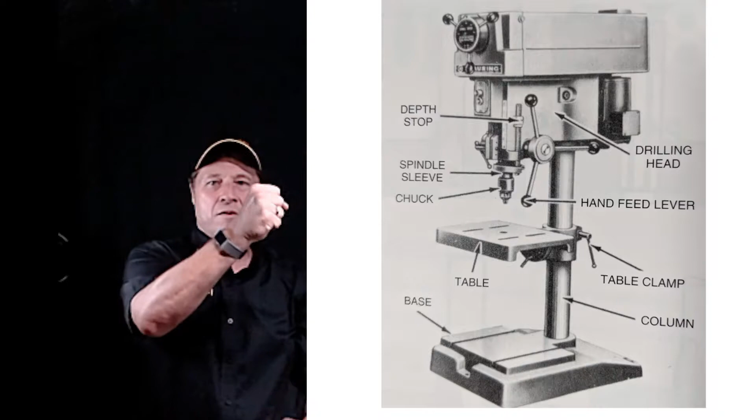Now, imagine if the table was slid down that column a bit more, and you're pulling that handle and not yet at the bottom of the hole. How do you keep pulling the handle? If it only had one handle, you'd have to hold it, get your hand up top, push it, stand on the side, turn your hand over, lift it, grab it again, and pull it. That's why you've got the 3 handles there. You pull, the next one comes around, you pull, and then you go to your final depth, and then you back it off. That's why you see those 3 handles on the hand feed lever.

The table, you'll see on the back of the table, is a table clamp. That clamp does exactly what it says. You lock it, and that table will not go down or up the column.

A lot of these drill presses have a toothed track - I don't want to call it a gear, but there is a gear in the table. As you crank that handle, that rolling gear will pull the table up or roll it down. Not all drill presses have it; a lot of them you just have to unlock it and shimmy it up the column and back down. It's not designed to be precise, it's just designed to get your work closer to or further away. That handle and the depth stop are what's going to help you get your precision.

A lot of times on these drill presses, the table can tilt to the left or to the right, and some of the tables even swivel, which is really helpful when you're trying to do 3 or 4 holes and you've clamped a vise to the table, and you don't want to unclamp the vise every time you've got to drill another hole. So some of these tables have some maneuverability so you can rotate into the next position. On some drill presses, you can also rotate the head around to bring it into another position.

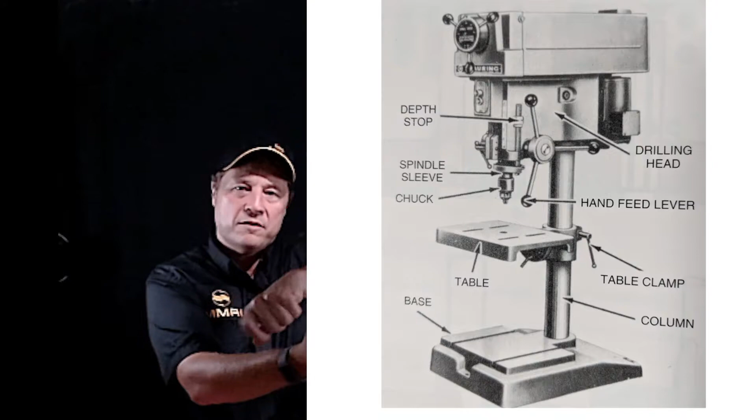You can take that table and swivel it right around 360 degrees, so you can get it right out of your way, and you can put a large piece of material on the floor and drill down into that.

So pretty universal, very useful. But the drill press, guys, is not the go-to choice for precision hole manufacturing. Now, can you accomplish some precision holes with it? For sure you can, and there's different ways of doing that. But if you want repeatability, speed, accuracy, working from a datum or starting position, you're going to do all your drilling on a mill. The drill press is for less precise hole creation or feature creation on holes.

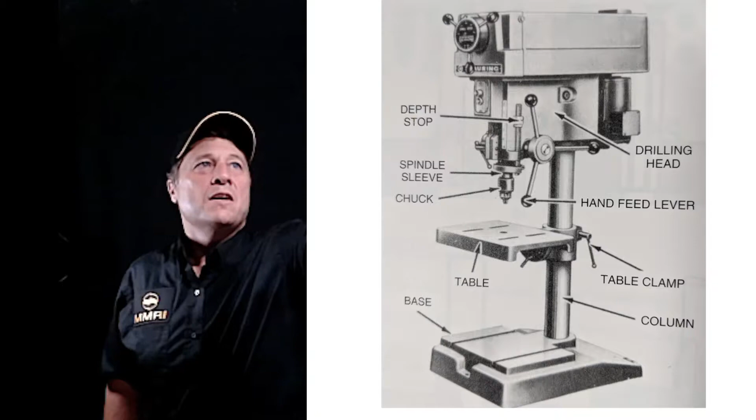What functions can a drill press perform? What features can it create? So here's the main features, guys. One, we all know drilling, right? That's its primary ability, is to drill holes, to create holes.

Two, countersinking. We'll talk about each of these in a minute. Three, tapping. Four, spot facing.

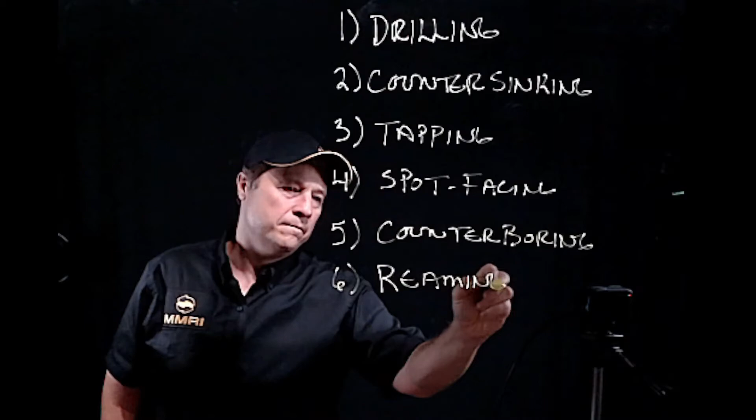Five, counter boring. Six, reaming. And seven is boring. So here's your seven main functions: drilling, countersinking, tapping, spot facing, counter boring, reaming, and boring.

Okay, so let me tell you what each of these features looks like. First of all, drilling. Let's say these are kind of the description of each of these features. Drilling is the operation of producing a hole by removing metal from a solid piece of material. If you're not able to take notes, come back to this section in the video when it's posted to get these descriptions.

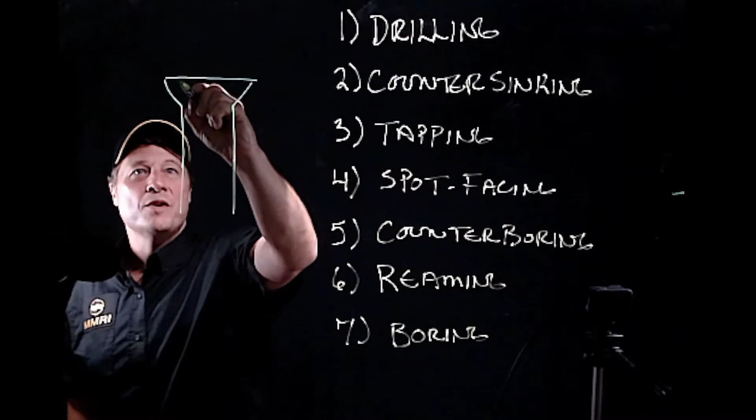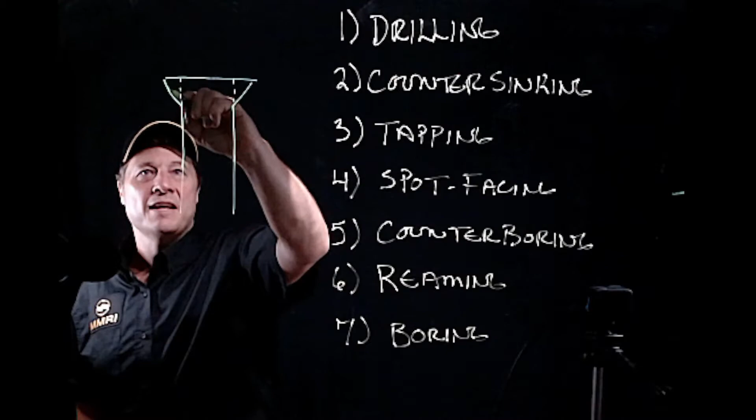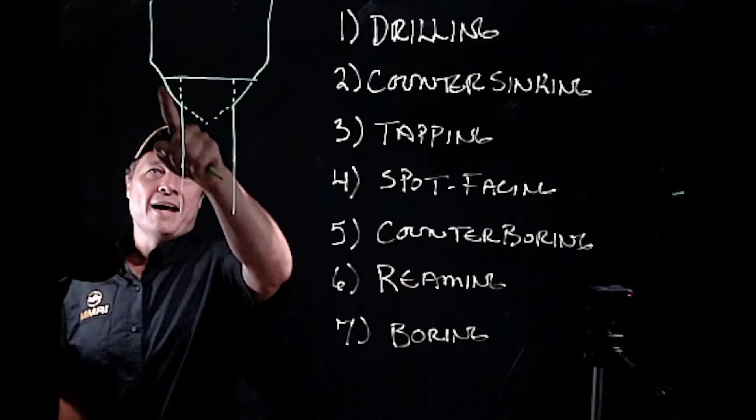Countersinking is the operation of producing a tapered enlargement on the end of a hole. So once I've produced a hole here, I can produce a conical or tapered feature on top of an existing hole. Originally the hole was just drilled straight like this, and then I put a countersink tool in, and that tool would continue in here, then come up like this if this were the countersink tool, and it would look like that. It looks like a drill, but it has a form that just cuts a conical shape on the top of a hole. That's a countersink.

Why would we put a countersink on the top of a hole? Well, a couple of reasons. One is a lot of guys just do it for aesthetics, to remove sharp burrs from the top of a hole. Other times we put it on to allow for a flat head bolt, since flat head bolts are tapered. So you create a countersink around the top of the hole to a depth allowing the bolt to sit just shallow of the top of the workpiece.

What about reaming? What is reaming? Well, reaming is the operation of sizing and producing a smooth round hole from a previously drilled hole. So this is interesting. If I want to drill a hole according to a print, the print says this hole needs to be...

0.500 inches in diameter. One of the things we're going to learn in this course, guys, is that precision matters. If you said to me, 'Adam, I need a half inch hole,' I'd ask, what's the precision? 'Oh no, I just need a half inch hole.' Okay, so I'll center drill and then drill a half inch hole, take a half inch drill and just bang it through. Is it going to measure a half inch? No, right? It'll be a couple thou, big or small. A drill is not super precise. It's approximate, very, very close.

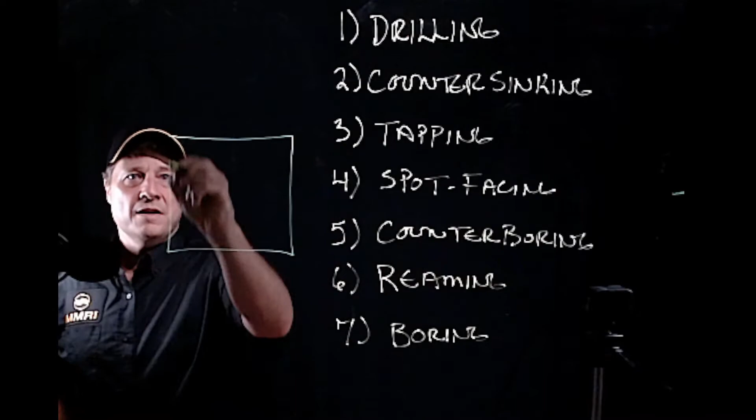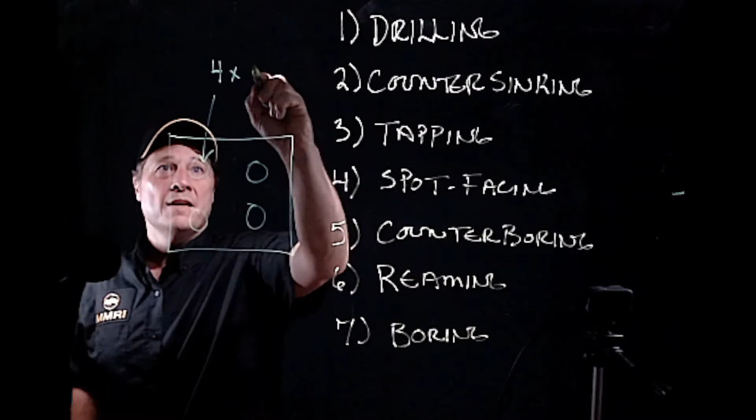You want a 0.500 hole, right? What the hole is used for matters. That's explained to us on the engineered drawing. If your drawing just says 4 holes and points to the hole saying 4 times 1/2 inch, that's what your print says.

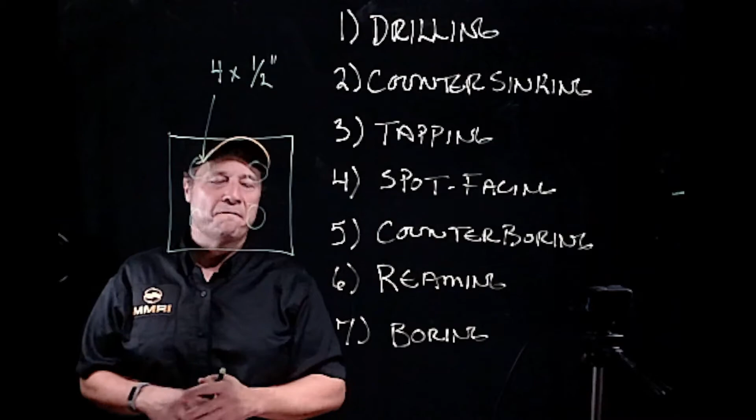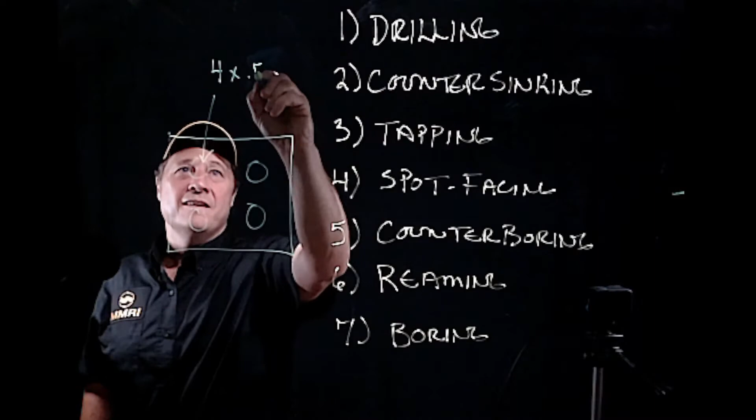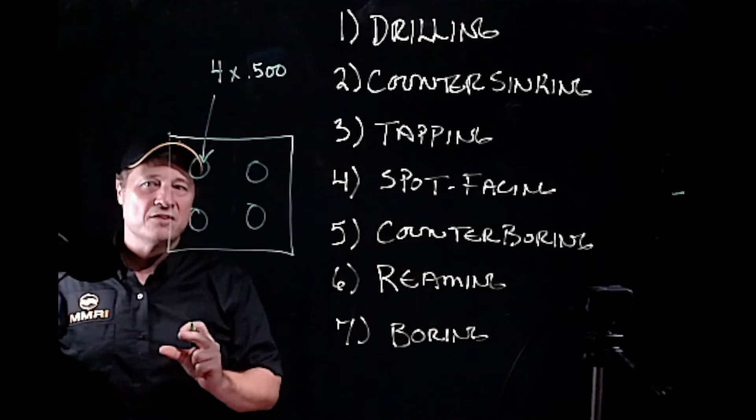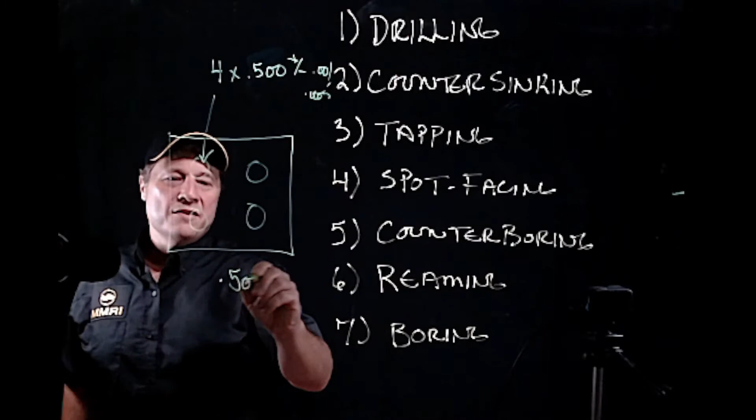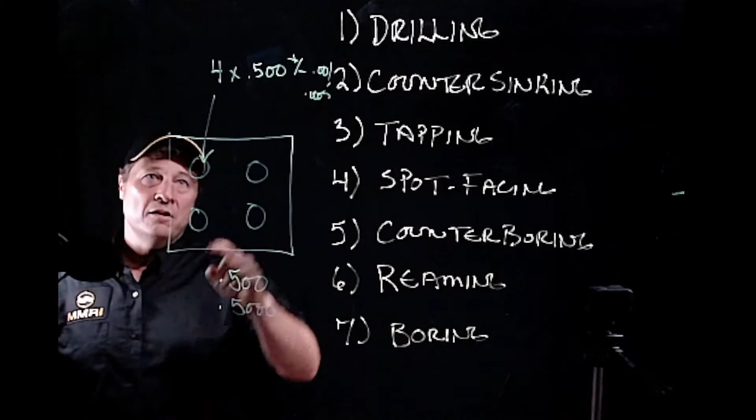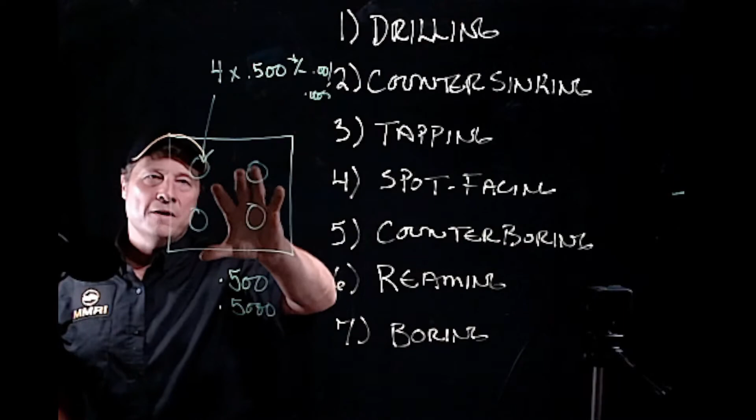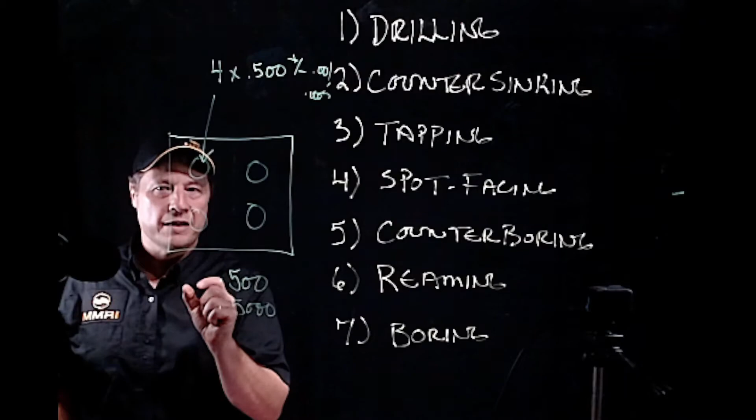But anytime I see a 3 decimal place, and especially a 4 decimal place, I'm going to ream that hole. So I would go get a drill that's 1 nominal size smaller than 1/2 inch. There's a rule to follow, we'll get to that later, but I want a drill that's approximately 11 to 15 thou smaller than 1/2 inch. I want to intentionally drill that hole a certain percentage smaller.

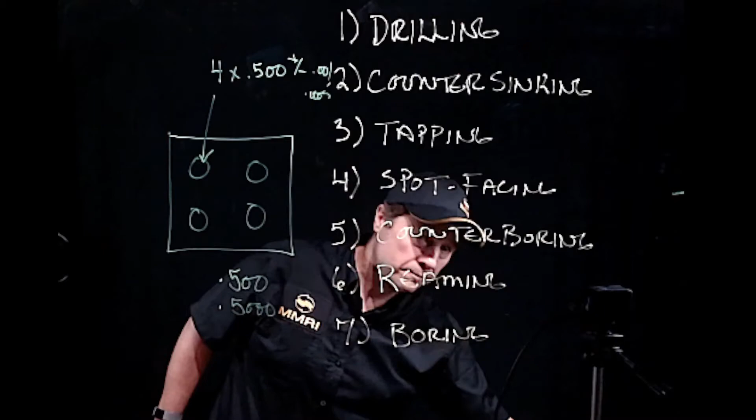Once I've drilled that hole, I will get a reamer and ream it to the exact size. A reamer is a precision cutting tool designed to enlarge an existing hole. You cannot put a reamer in a drill press on solid material and drill a precision hole. It does not have a cutting point, only cutting edges along the length of the tool. If you try to press that down into a part, you might as well take this marker and try to press it through steel, because there's no cutting edge at all.

It just crushes the reamer. So you need an existing hole, then you put the reamer in at the size you want, and you trace or follow that hole, and it will remove the excess material, create a good finish, and create an exact size.

Next, boring. Boring is the operation of truing or enlarging a hole with a single point cutting tool. Again, I'll create a hole to start with, and anytime you have to bore a hole to size, cut it as close to size as you can first. If you've got to cut a 1 inch 100 thou hole and you have a 1 inch drill, take the 1 inch drill.

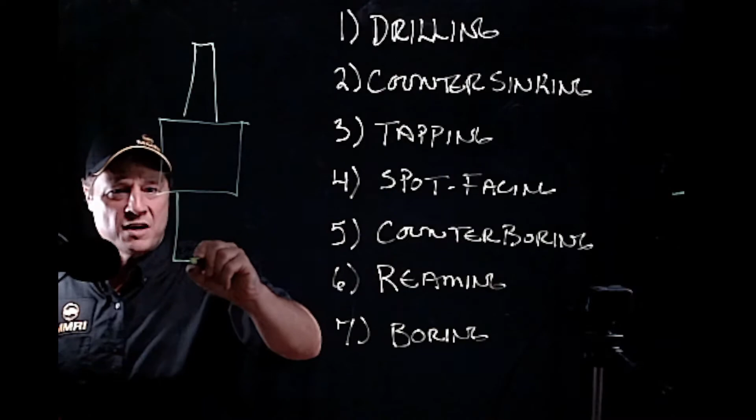Take the bigger drill and get rid of all the material you can, then put in your boring bar. You'll see in your Technology of Machine Tools book, it's just a head that fits into your drill press. A boring bar comes out of it, and then your cutting tool will be there.

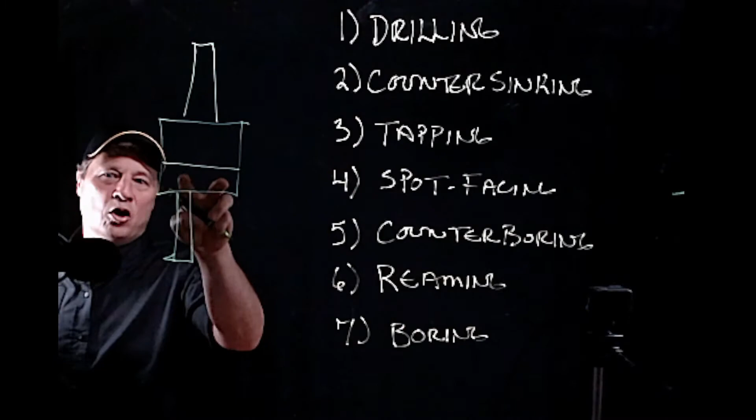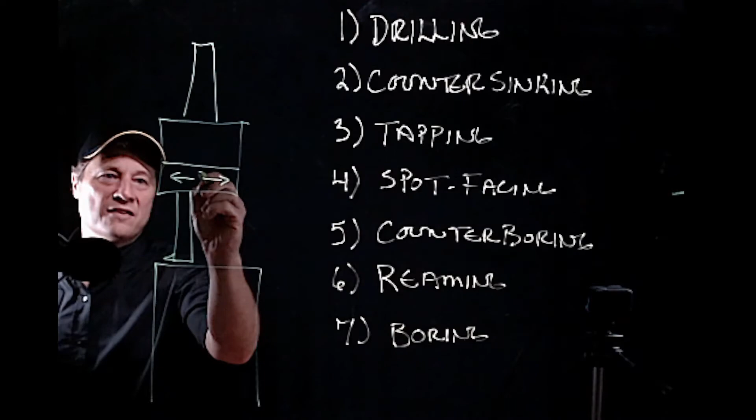This is dovetailed here, so I can take the lower half of this boring head and move it that way, or move it that way. You'll see my boring bar is off center. I would have an existing hole here, and I could bring the boring head down and dial this out this direction until the cutting tool is just touching this wall.

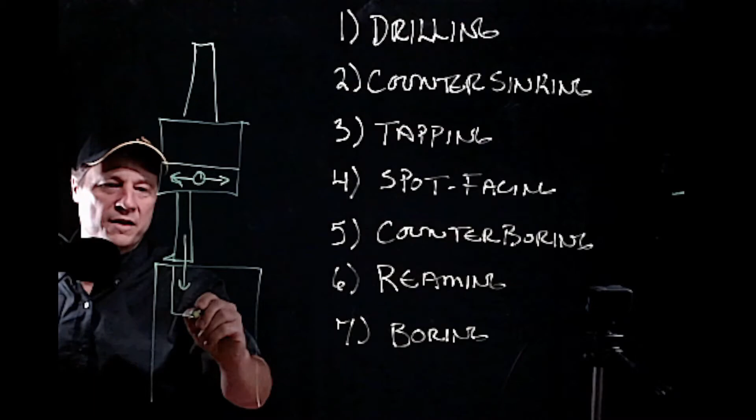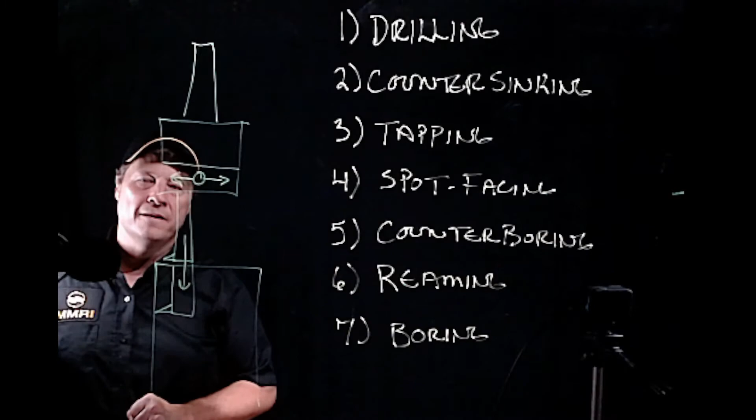I'm going to bring this down inside the hole with my cutting tool, just until, as I rotate this by hand, it starts kissing the inside of that hole. That's my starting position. Now, if I know the width of this hole is exactly 1 inch, and I need it to be...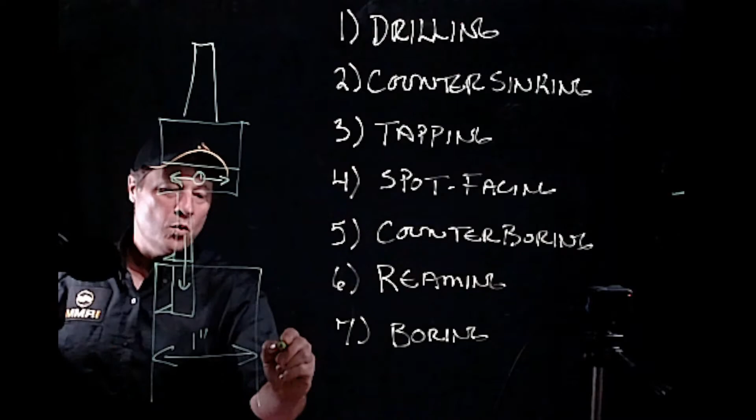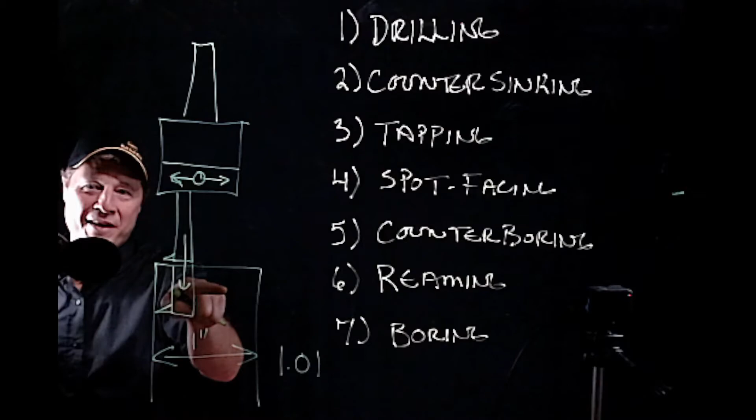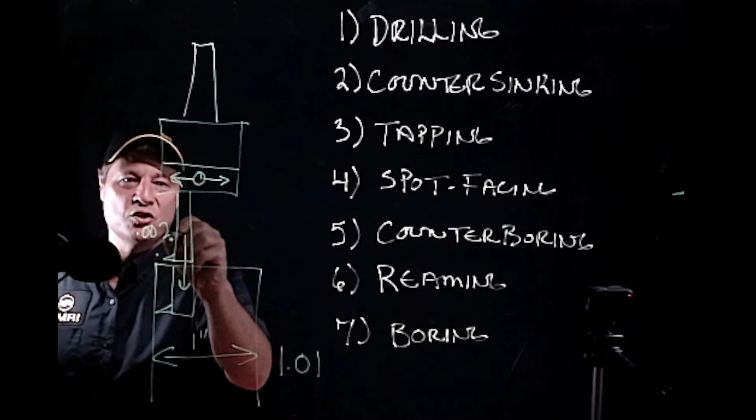1.01 inches, 10 thou bigger, then whatever I dial this out in this direction is also creating that same depth on the other side, because the boring bar spins in a circle. So if I take a cut on this side of 2 thousandths of an inch, 0.002 depth, then I end up cutting 0.004 out of the inside of the hole.

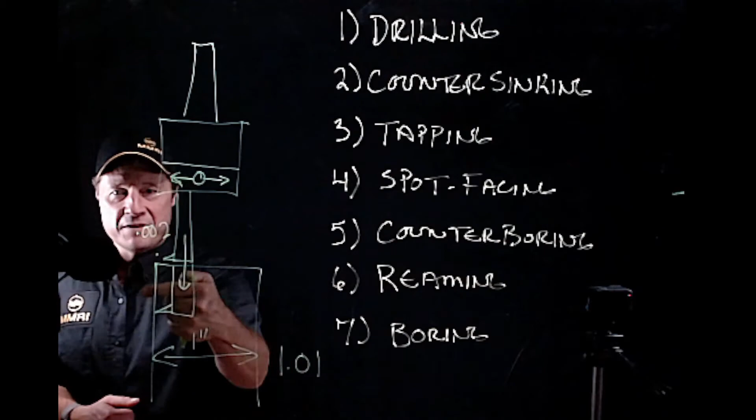Because this is a linear move, whatever I move this, it cuts twice that off the inside diameter. So this is how we bore a hole to size.

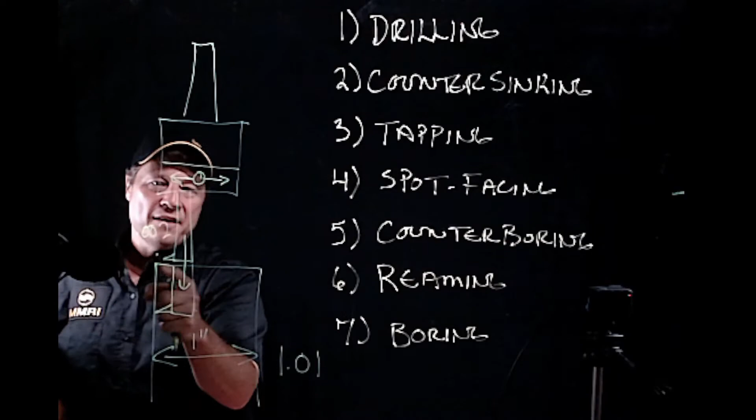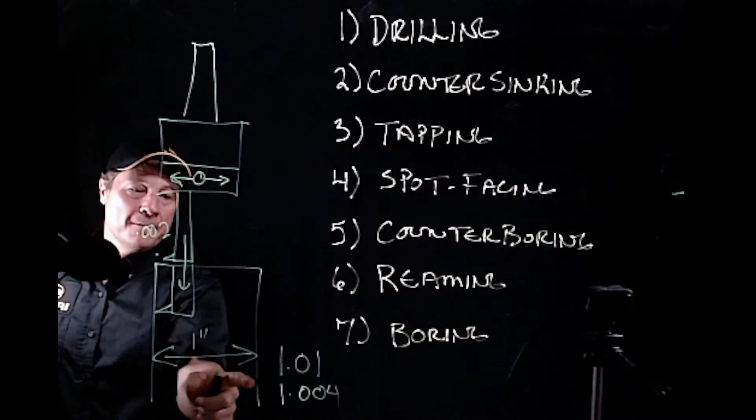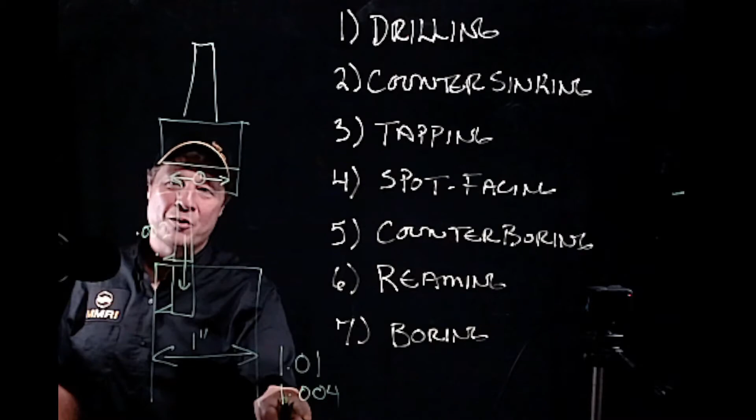So I would maybe start with 2 thou, and that should remove 4 thou, and in theory my new size should be 1.004. I should have removed 4 thousandths of an inch. If that's what I get, I know this is cutting accurately, and then I can try to bring it to size, or maybe take another 2 thou and get it to 1.008, and then take 1 thou on my final cut and bring it to 1.01.

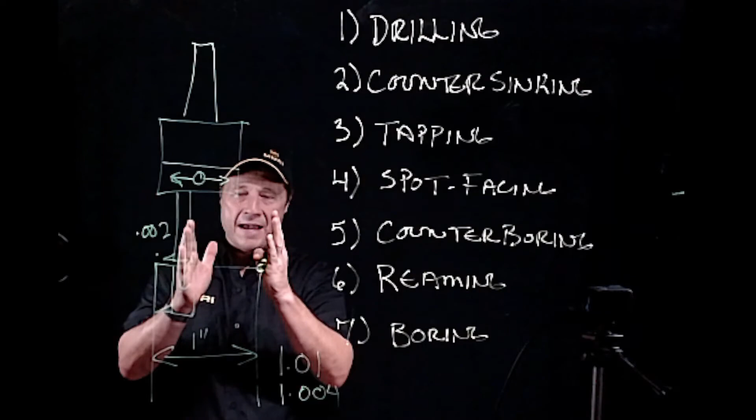So that's how we bore a hole: we use a boring head with a boring bar with a single point cutting tool, and we engage into an existing hole to open it up to a desired size.